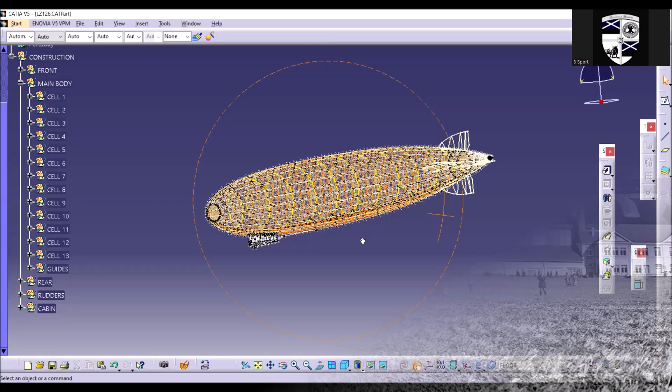Exactly 100 years after its completion, we want to take a detailed look at the design of Germany's first big Zeppelin after the First World War, the LZ126. To better understand the construction of this very special and successful Zeppelin, I was designing it in CATIA, and we will have a closer look at this throughout the video.

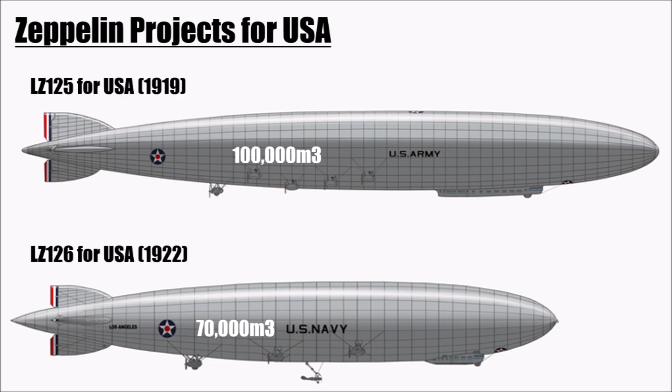As we discovered in the last episode, Britain and France demanded a limit for the maximum size of this new German Zeppelin for the USA. So instead of 100,000 cubic meters, it could only have a gas volume of 70,000 cubic meters, so that it's not bigger than French and British Zeppelins.

Consequently, for the hangar the Germans still had in Friedrichshafen, the ship was 200 meters long, and its rings had the largest diameter of 27.64 meters. Including cabin, it was 31 meters high. So let's take a closer look at these rings first.

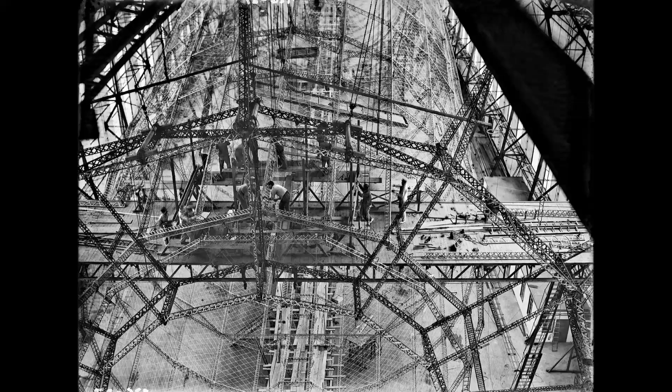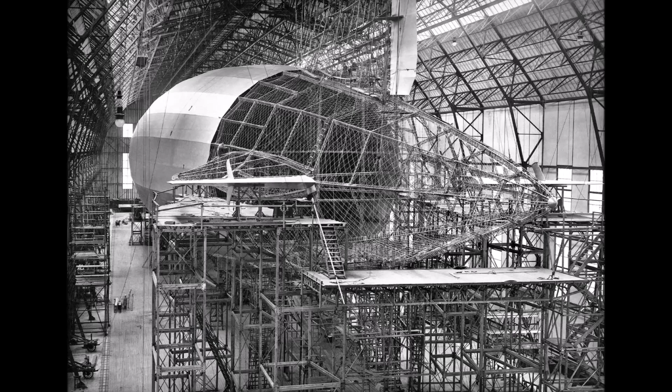First of all, these rings are built with beams, and these beams are profiled aluminium elements which are riveted together. The Zeppelin company had their own design and test department for these beams, and they developed these structures a lot further over the years. The first Zeppelin had very simple L and T elements. LZ2 and 3 had tubes in their beams and a triangular structure.

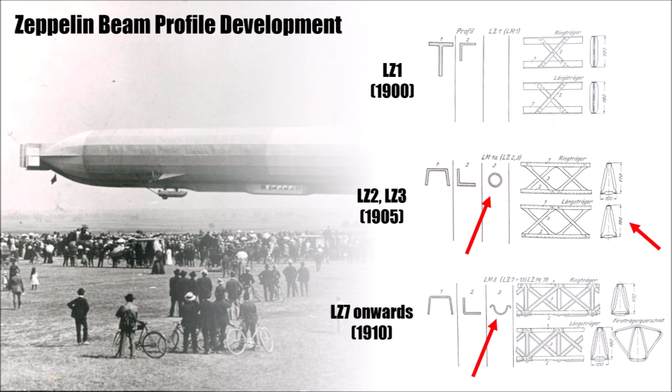A huge innovation from LZ7 onwards was the introduction of crimped profiles. They were very light, gave a lot of stability, and were easy to manufacture. This, by the way, was an idea of a man called Claude Dornier, a new engineer at Zeppelin.

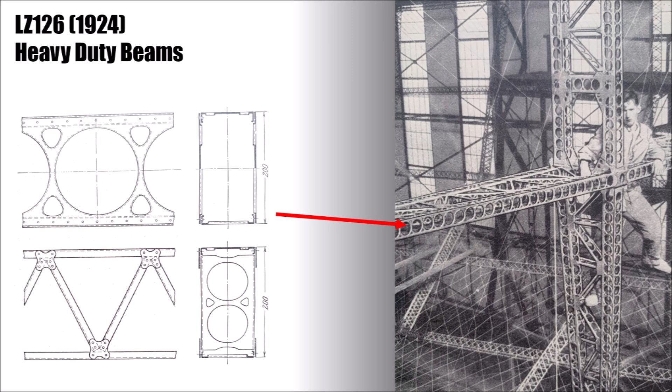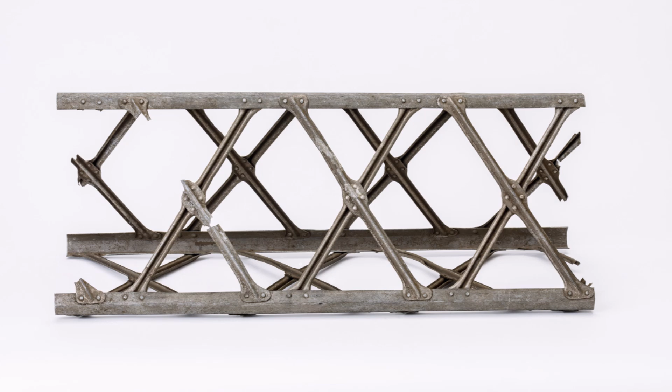A new design which was first used in the LZ126 were now beams with a box profile for heavily stressed areas like the rudders. At Zeppelin, they analyzed their designs in great detail. First, they inspected the base material looking for cavities. They material tested their supplied aluminium, then crimp tested it and also checked the material for changing properties through aging, corrosion, heat and cold treatment.

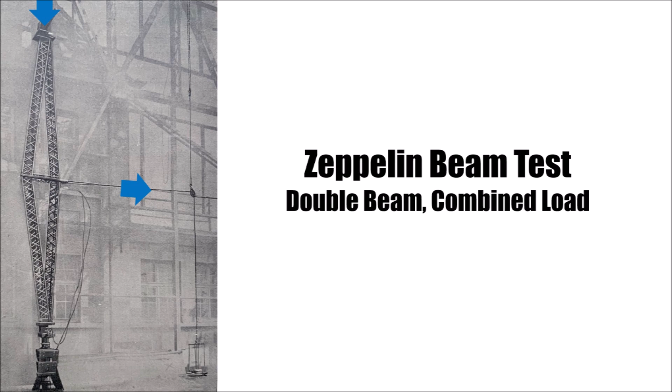After assembly of a beam, they tested it for bending, also with combined loads. As an example, this is a 2.6 meter long beam of the LZ126, which could withstand a vertical load of 7,043 kg before it kinked. And this beam only had a weight of 1.3 kg. So it could withstand the same loads as beams which are built with pipes, but it's a lot lighter and cheaper.

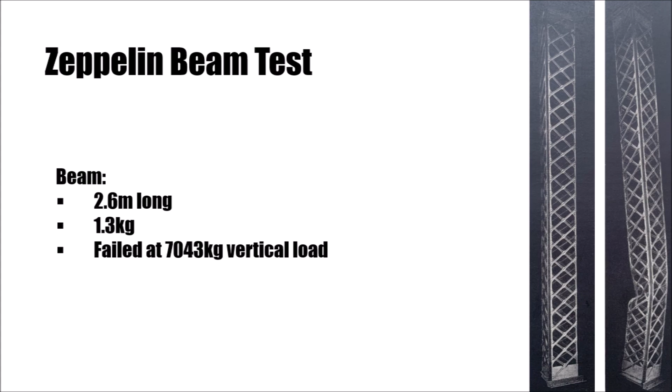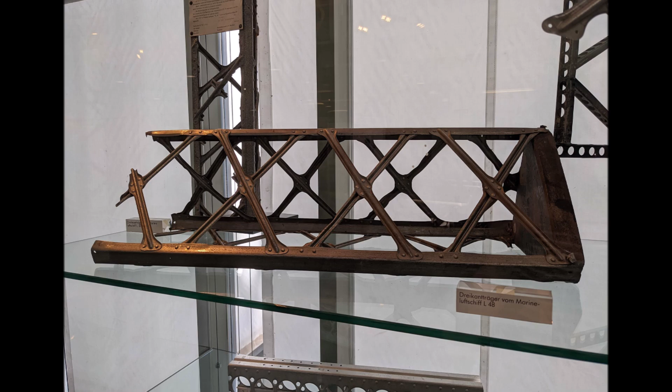Also, for the Zeppelin company it was very important to use beams which just bend but keep the connection instead of suddenly failing and breaking apart. Also, while failing, the structures shouldn't create sharp edges to avoid puncturing the gas cells. That's why all components of the beam have rounded edges.

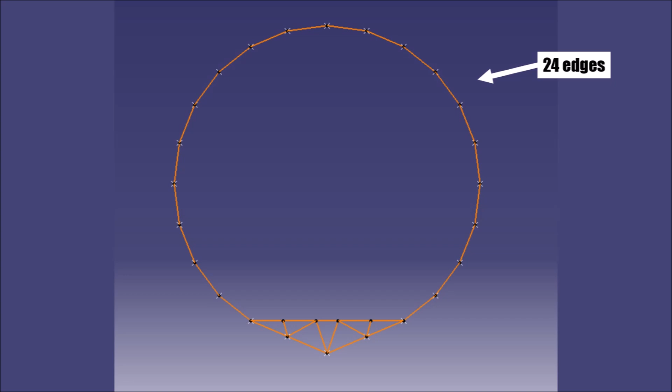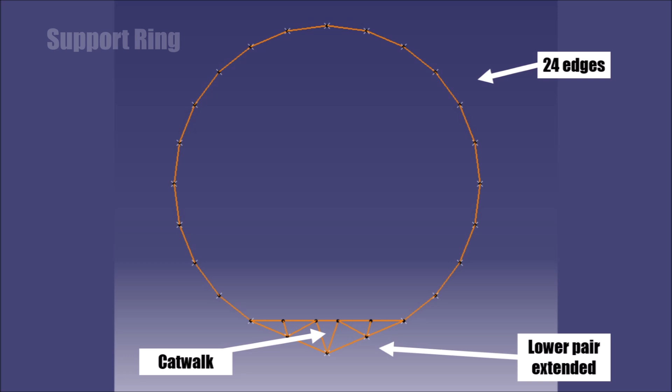A ring of the Zeppelin LZ126 was a 24-edge profile of beams. The two lower pairs were extended, which created a reinforced structure at the bottom of the ring. The large triangle in the middle is the catwalk through the Zeppelin. And this is a support ring. We will see what that means in a minute.

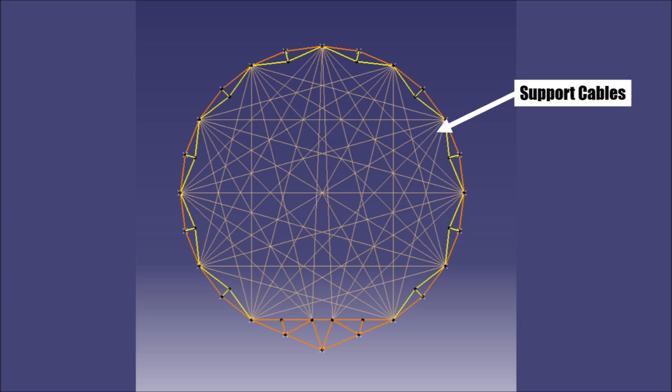A main ring is a bit more complex and had a double beam structure for reinforcement, here yellow. At the connection points between the double beams, the reinforcement cables were connected. So this gave them a very light and rigid structure. The gas bags were sitting between the main rings. The gap between main rings was 15 meters at the LZ126. Two support rings were positioned between the main rings, so the gap between rings was 5 meters.

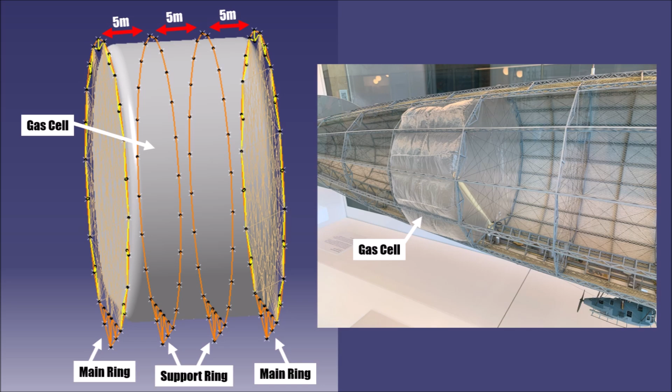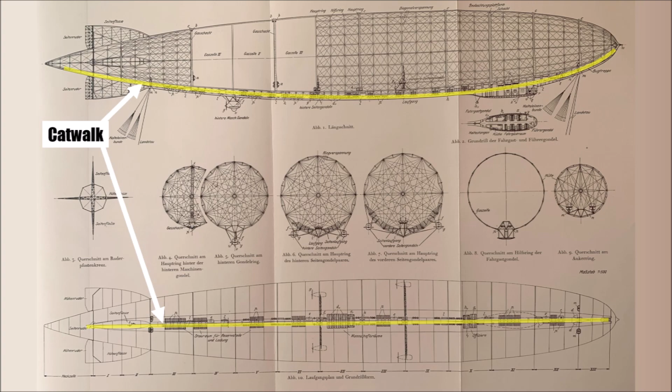The LZ126 had a teardrop shape, so the ring's diameter was getting smaller towards front and back, but the main structure stayed the same. So we have a catwalk which runs through the whole ship, from the nose tip to the very back. So you could reach every gas bag while flying and repair it. Also, there were ladders between gas bags so you could go to the top. During war times, they had machine guns on the top. Here it helped to navigate with stars.

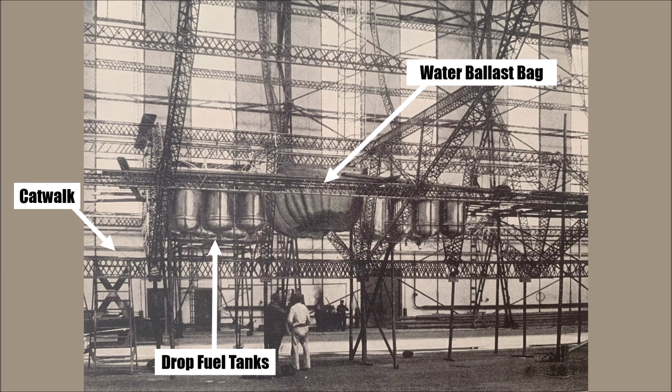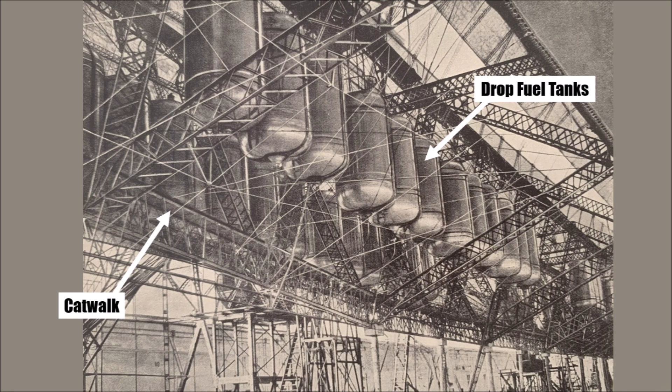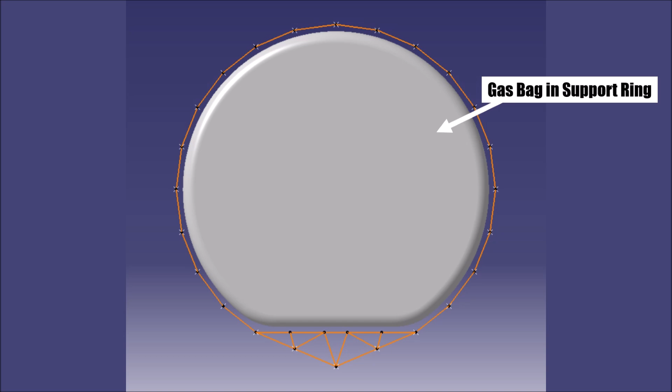Left and right of the catwalk are fuel and oil tanks, water ballast bags, compartments for the crew and cargo areas. The heaviest components are positioned at main rings because they can transmit the load into the rest of the structure better. Between main and support rings are many cables and ropes which transmit the lift force of the gas bags into the aluminium structure gently. Another important point to increase reliability of the ship. Between gas bags and skin of the Zeppelin is a certain gap to avoid too much influence from cold rain or hot sun.

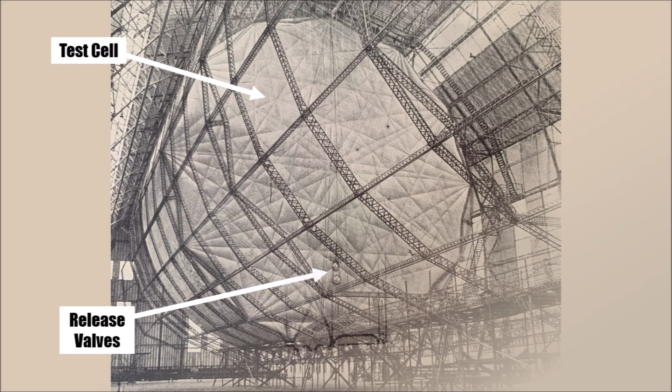Each gas bag has two automatic overpressure safety valves with 500 mm diameter. They sit at the bottom of the gas bag to avoid accidentally losing all hydrogen of the bag, and vent into a chimney to the top. At the top, there are additional valves which can be controlled from the cockpit to release hydrogen. And on top of the ship are rearward-facing vents to gently release hydrogen into the surrounding airflow.

The skin of the ship uses longitudinal cotton panels to reduce the number of split lines which the surrounding airflow has to cross. In other words, to reduce drag. The thickness of the skin varies depending on the position of the ship. For example, close to the engines and the propeller, it is thicker to protect the gas bags better from potentially flying around ice pieces or other things.

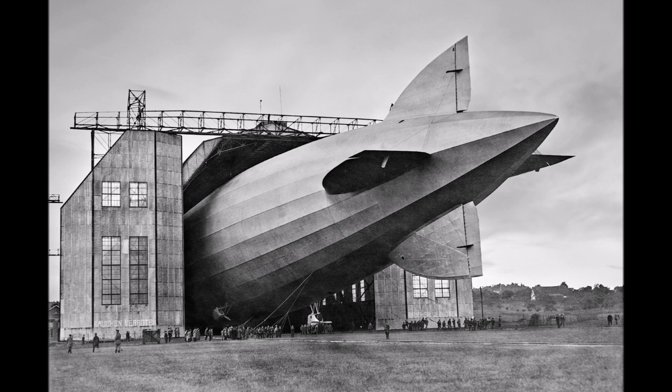The finished skin is then painted with an aluminium powder mixture, which seals the ship against rain, reflects sunlight, and tightens the cotton skin, which again reduces drag. All components are positioned inside the main body. The engines, however, are intentionally positioned outside of the hull to have an air gap between gas bags and engine car with its ignition system, because this is a hydrogen ship. Later American ships could have the engines inside the hull because they were using helium.

4 engine cars were positioned at the side and one below the hull, which also carried the rear landing buffer. The cars at the side were positioned in different heights to not interfere with each other. These engine cars could be reached from the catwalk through slide doors and a ladder. The ladder was foldable to reduce drag when not in use.

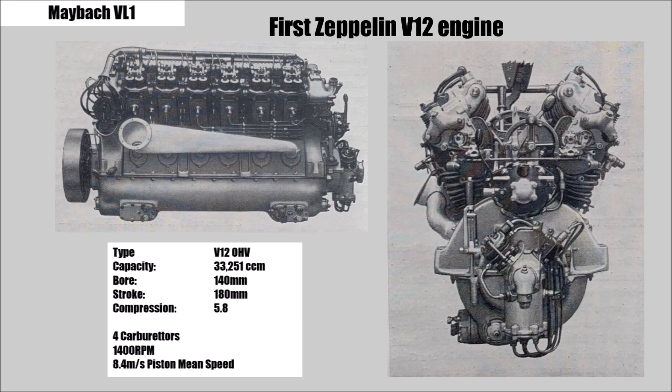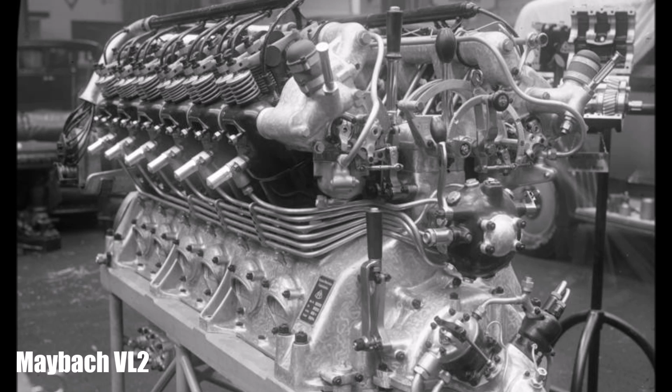The engines were Maybach VL1 V12 engines with 400 horsepower each, so the ship had 2000 horsepower overall. The VL1 engine was especially designed for the LZ126. Design priorities were reliability, especially under long full throttle runs, high lifetime, and low fuel consumption. It had 33.25 liter capacity, 3 overhead valves, 1 large inlet, and 2 small outlet valves.

It had 1 camshaft in the center of the V and 4 carburetors, which were especially designed for airship applications like high altitude. Each engine was started with compressed air to save the weight for the starter. After a start, a 2-step compressor was driven by the engine to fill 2 50-liter bottles with 29 bar. Once the pressure bottles were filled, the compressor switched off and was decoupled.

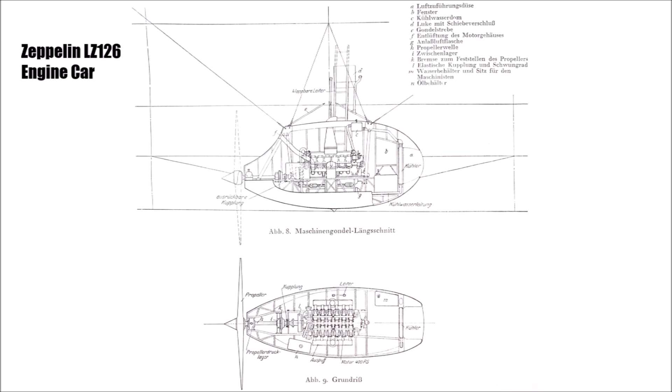The engines were designed for operating at 1400 RPM, which meant the propeller could be directly fixed to the crankshaft and a gearbox wasn't necessary anymore, so less risk for any reliability issues. Although this is a 4-stroke engine, the rotation could be reversed, for example to brake the Zeppelin for landing. To do that, the camshaft was pushed longitudinally with compressed air. There was another cam for each valve and hence the engine could rotate the other way.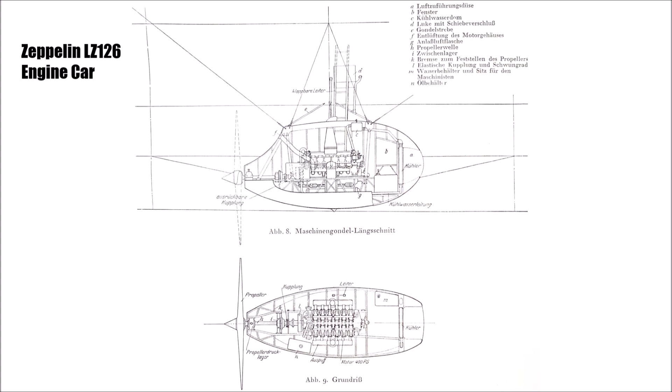The engine car itself was designed in a way that mechanics could easily work on the engine during flight. The car was aerodynamically shaped with a controllable air intake at the front to regulate air for the forward-sitting water radiator. A mechanic stayed at the engine at all times and a shift was 2 to 3 hours. They used wooden 2-blade propellers.

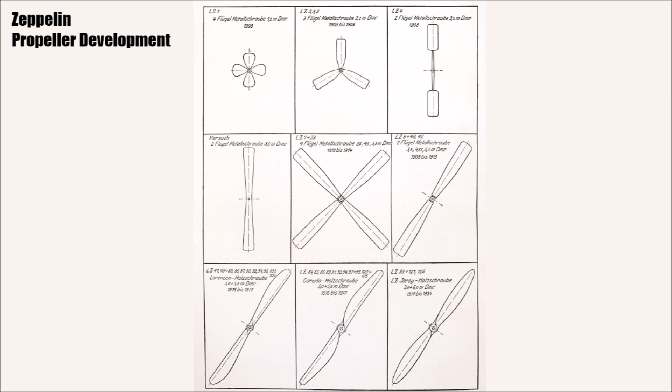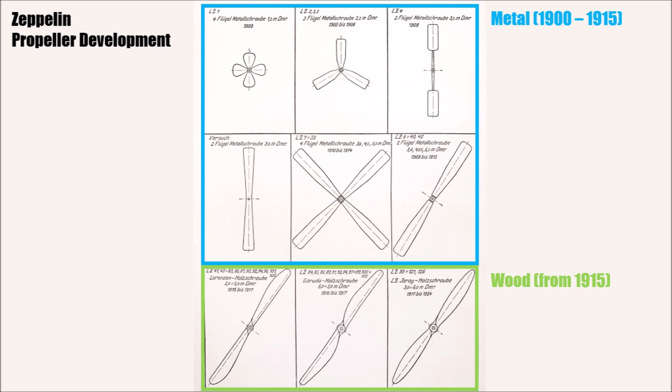The Zeppelin did a lot of research and propeller designs over the years, and after starting with metal propellers, they changed to wooden propellers during World War I, because it allowed them to reach more efficient aerodynamic designs. The LZ126 propeller was a so-called Jaray design, named after Paul Jaray, a young talented Zeppelin engineer who later became a famous car aerodynamicist.

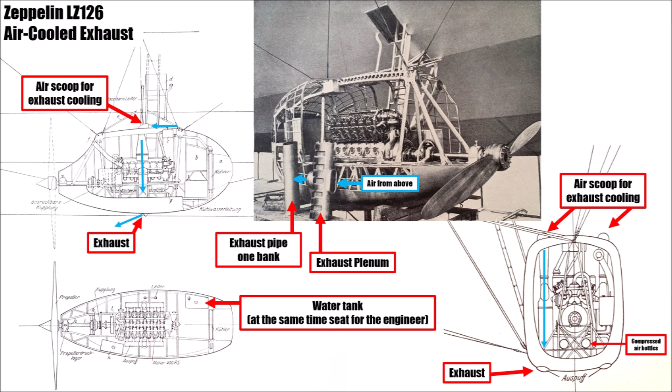LZ126 had an air-cooled exhaust for each bank in the floor of each engine car. The fuel tanks were inside the hull slightly above the engine, so fuel pumps were not necessary. Next to the catwalk were 70 fuel barrels in the normal setup, but this number could be increased to 114 for longer journeys, which extended the range to more than 12,000 kilometers and 110 hours in the air. So the LZ126 could go from Germany to New York and back without a stop.

So these 420-liter fuel barrels were hanging next to the catwalk in groups of 3. They were suspended with cables and could be dropped any time. To pump fuel from the large barrels next to the catwalk to the smaller tanks close to the engines, they used propeller-driven pumps. The same barrels were used for oil.

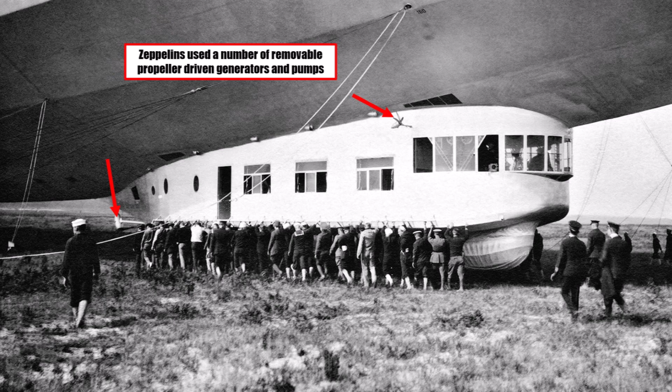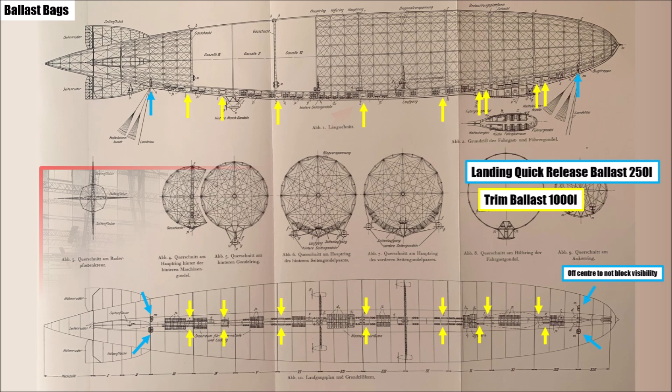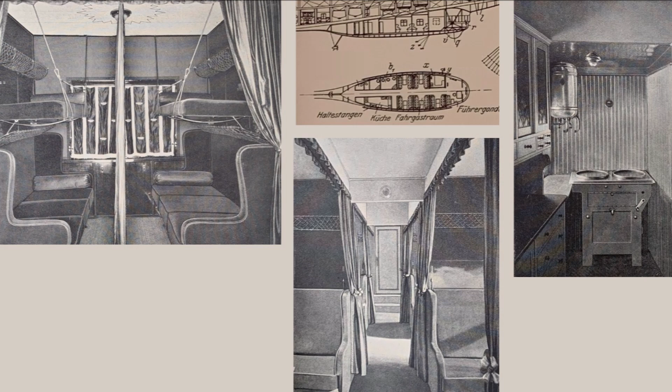Officially, the LZ126 had to be a civil airship, which was a requirement from Britain and France because Germany was not allowed to build military airships. And so, the cockpit includes passenger compartments. Also, comfort and safety of the ship had a higher priority than on war Zeppelins before. The cockpit is rigidly connected to the hull of the ship without any air gap, because there is no engine behind the cockpit anymore. So the cockpit can be easily reached from the catwalk with a ladder.

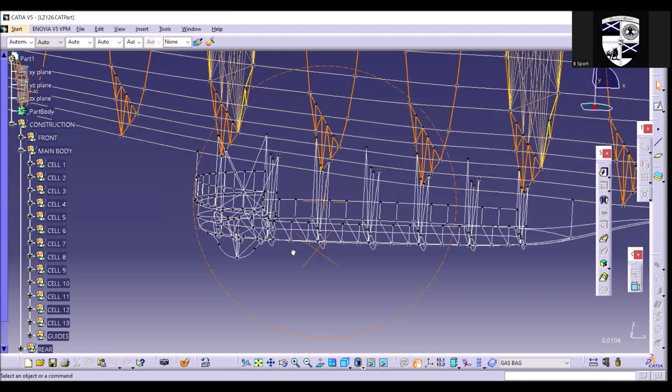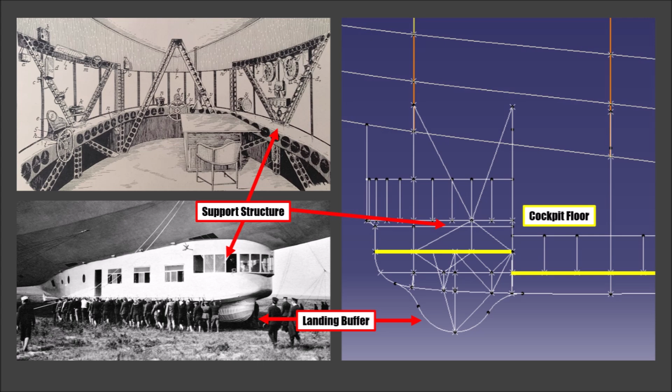Because of the aerodynamic round shape, the floor of the cockpit is slightly higher than the passenger rooms, which you reach through a door and a small stair with 2 steps. The landing buffer is right underneath the cockpit, and you can see the beam structure which makes sure that these forces are transmitted into the Zeppelin's hull without crushing the cockpit.

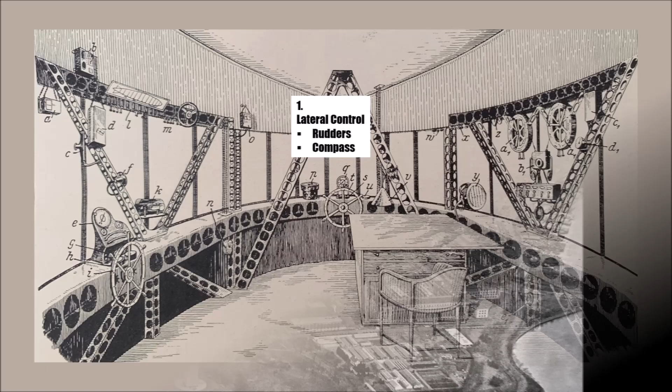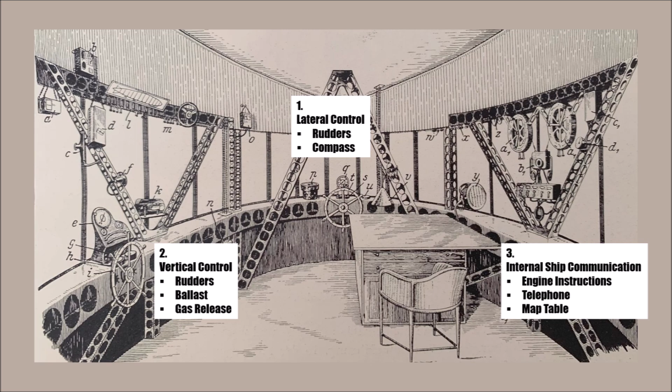Zeppelins were operated differently to planes. So, in the cockpit, one pilot was responsible for the flight direction, which is the position in the middle, and another pilot was responsible for altitude and trimming. You can see a map of the ship and the control boards for ballast and gas release here. A third officer was responsible for communication with the engine cars, and there was a telephone for different positions in the catwalk. This officer was sitting on the right-hand side at the map table.

The rudders were operated by chains and cables which ran through the ship. For emergencies, for example when a cable snapped or got stuck, there was another control board in the stabilizer fin at the back. Clutches allowed to operate rudders in pairs or individually.

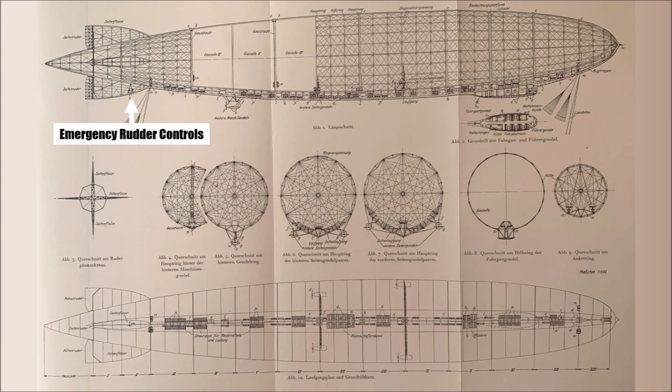To adjust the altitude of the ship, there are different options. Hydrogen gas can be released. Ballast can be dropped. But you can also adjust it dynamically by angling the whole ship, so the hull produces lift or downforce. You can do this by using the rudders or change the trimming of the ship by moving ballast, pumping water and fuel to different locations.

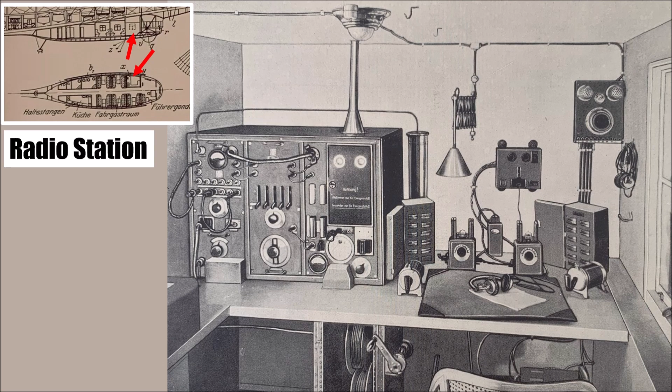Behind the cockpit on the left-hand side is the radio station. That is a separate, insulated room with overpressure. The radio station has a communication range of 2,500 kilometers and 500 kilometers for telephone connections. The Zeppelin uses 3 120-meter-long antennas, which have a Zeppelin-shaped weight at the end and can be lowered during flight.

The electric system of the LZ126 is very interesting. The standard voltage is 24 volt to keep the weight down, and is with that 4 times higher than on cars in 1924. The ship has a 60 ampere-hours battery, and electricity is generated through a number of wind turbines with 4 and 6 blade propellers. These generators can be moved into position during flight or stored away to reduce drag.

So why did the Zeppelin company do this, and why didn't they generate electricity at each engine, which would be much more efficient than through wind turbines? Because with locally positioned wind turbines, they have a short and simple system. They save weight and reliability issues with long cables, and there is less risk of sparks somewhere in the ship. The cockpit even had 2 hybrid generators. So one wind turbine combined a 1200 watt DC generator and a 1500 watt AC generator. The kitchen in the back of the passenger area had its own 110 volt generator.

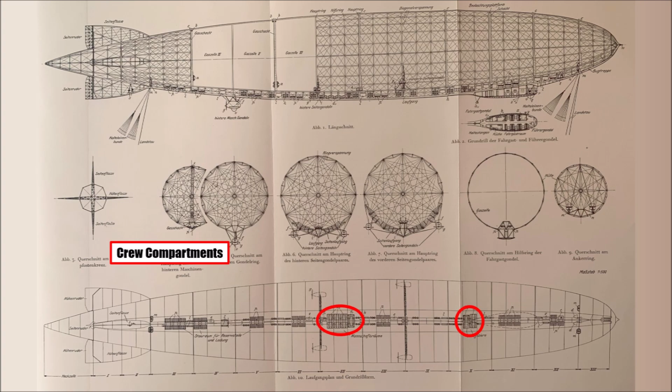For the 28 crew members, there are crew compartments next to the catwalk. One for the navigators at the front, close to the cockpit, and one in the middle for engine personnel. In these compartments they had a bathroom, a social room and a bedroom.

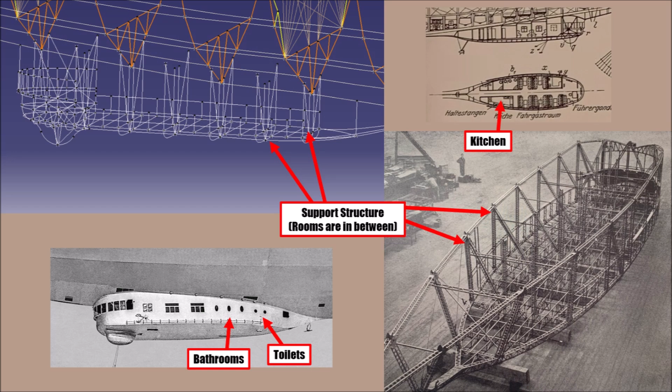For the passengers they created 5 rooms, and you can see how they were situated between the structural supports. These 5 rooms were like luxury train compartments, so they could comfortably transport 20 passengers, so 4 per room, and in the night they could extend 2 overhead beds, so everyone had a place to sleep. At the back there was a bathroom, a toilet, and opposite is the kitchen with its electric cooker.

So the LZ126 was not just important for the Zeppelin company to survive and finally to be allowed to build a Zeppelin again, it was also a masterpiece of engineering with lots of innovations and improvements over previous Zeppelin generations. When it was finished in 1924, it was the largest airship the world had ever seen.

Zeppelin boss and captain Hugo Eckener himself started with a crew of 27 in October 1924 to Lakehurst near New York. While trimming the ship, they found 2 blind passengers. 2 American journalists were hiding in the back of the ship. Eckener couldn't get an insurance for the America trip, and so the Zeppelin company was fully liable for all losses. And remember that the Americans were also not allowed to pay for the ship, so the Zeppelin company financed the build themselves.

The Zeppelin crew was welcomed in New York with a ticker tape parade, and the LZ126, now renamed to ZR3, became the most successful American airship. The Zeppelin and its crew became the best ambassadors for Germany in these difficult times and laid the foundations for future Zeppelin designs.